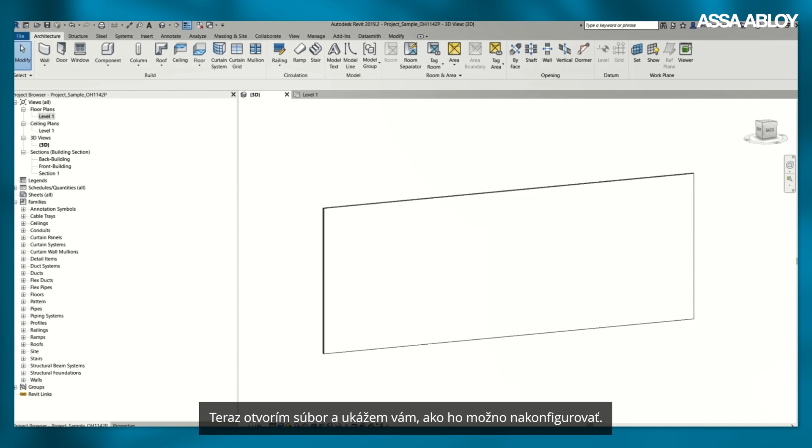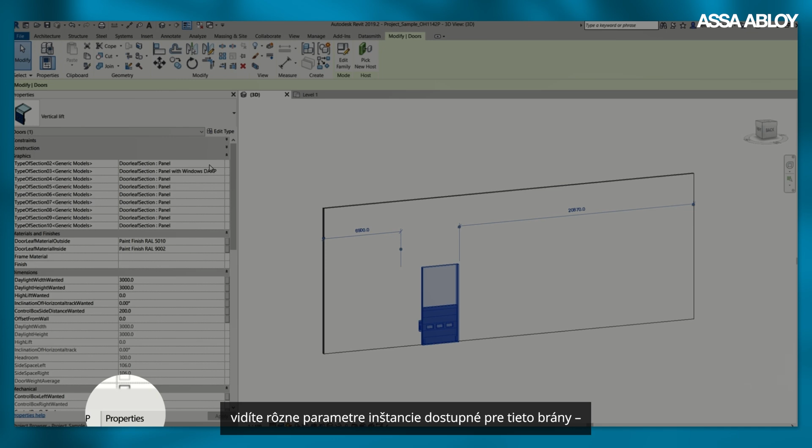I will now open the file and show you how it can be configured. I will use a sample project with just a simple wall and import the OH1142P Revit family that we just downloaded. Now that the Revit family is placed in my project, I can configure it following the product specifications. In the Properties menu on the left, you can see the different instance parameters available for this door. Everything from the dimension of the door to materials and window types.

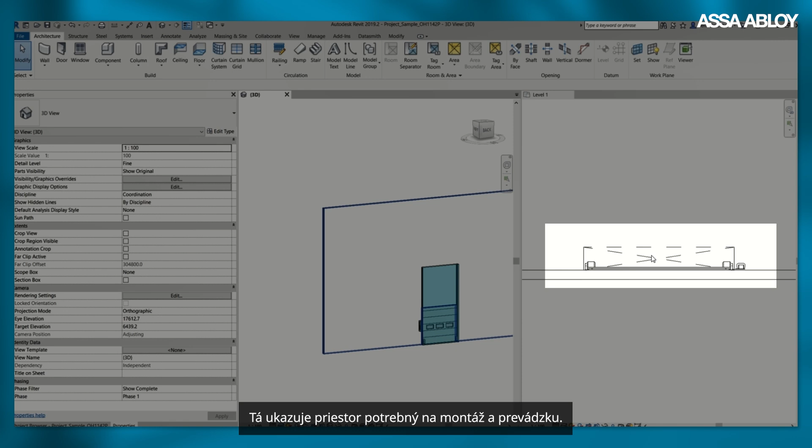When you see the door both in plan and 3D view, you'll see a clearance zone. This shows the space required for installation and operation. It will help you make sure that the door will not interfere with any other elements in your building. You can choose to hide the clearance zone by turning off the clearance zone parameter. And if you want to have it on again, you just need to turn it on again.

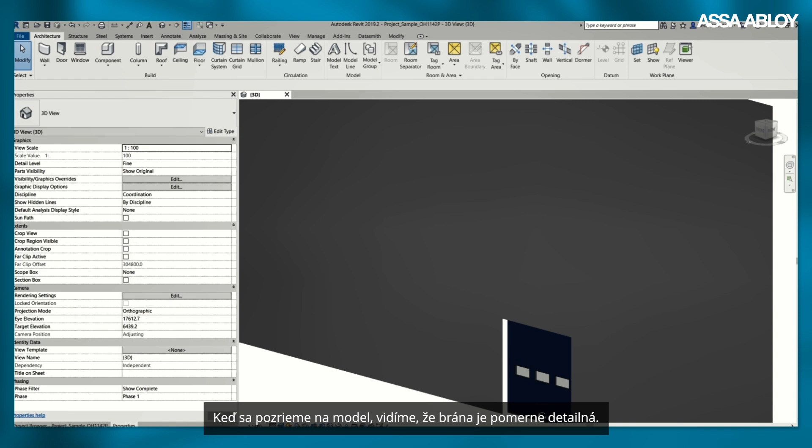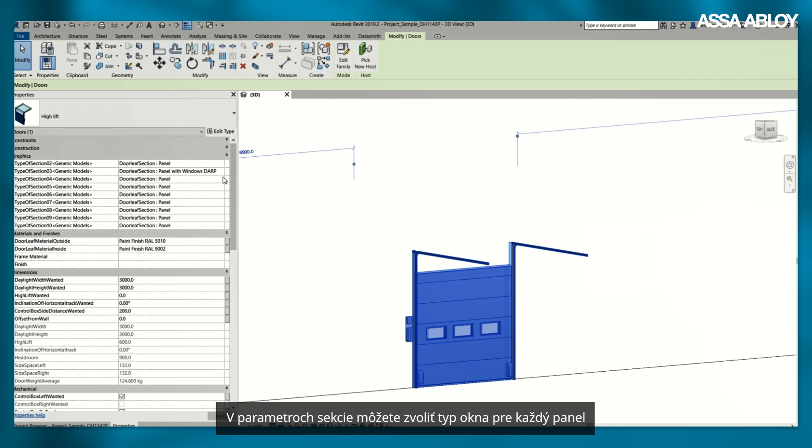If we look at the model, we can see that the door is quite detailed. We can see the material applied to the door both on the outside and inside, the number of panels, track set type, and the number of windows, for example. On the Properties menu, you can select the track set type. For this door, we have high lift and vertical lift available. In the Type of Section parameters, you can choose the window type for each panel, or simply choose a panel without windows. The number of windows is automatically calculated based on the width of the door.

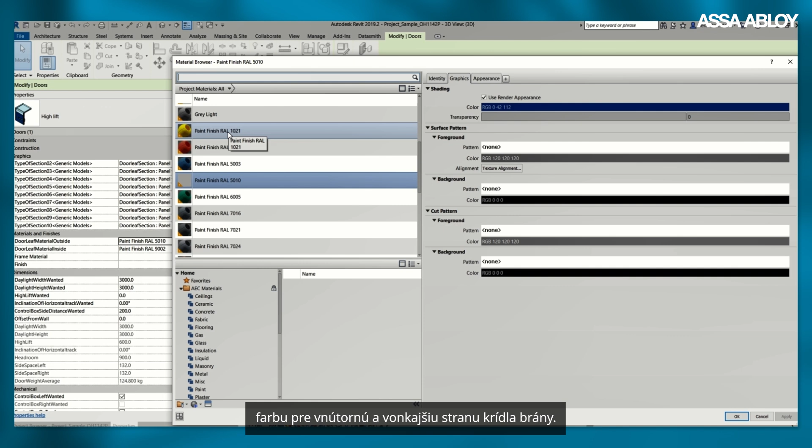Under Materials and Finishes, you'll find two parameters where you can select the color for the inside and outside door leaf. The Crawford OH1142P comes with a standard range of RAL colors. You can import the material library file that you downloaded before to guide you on this.

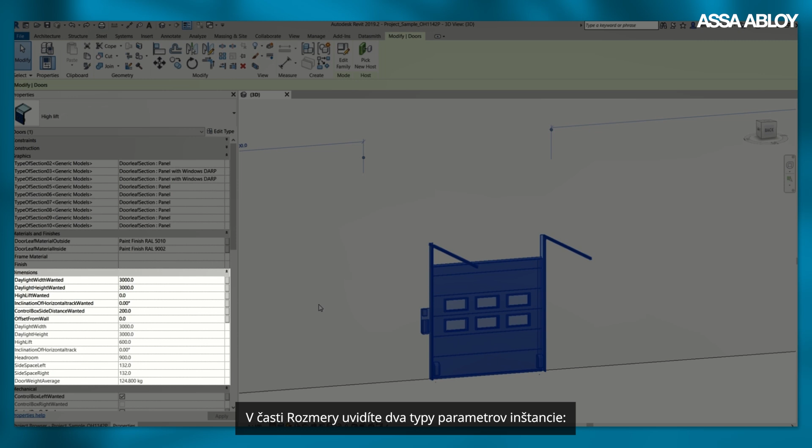Under Dimensions, you will see two types of instance parameters. The ones in black, which can be changed, and the ones grayed out, which are the corrected values. You can change the width and height of the door using the dimension parameters. There is a minimum and maximum value.

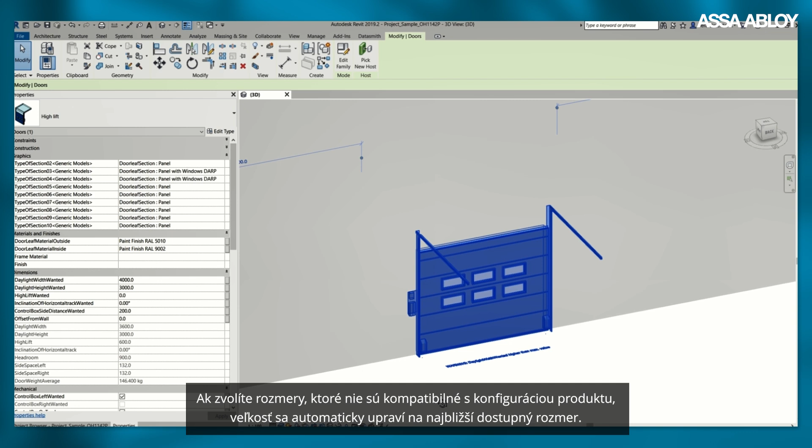If you choose dimensions that are not compatible with the product configuration, the size will be automatically corrected to the closest dimension available. In this case, the dimension applied to the model will be displayed in the instance parameters that are grayed out, and you will get an error message. The same applies to the high lift and inclination of the horizontal track.

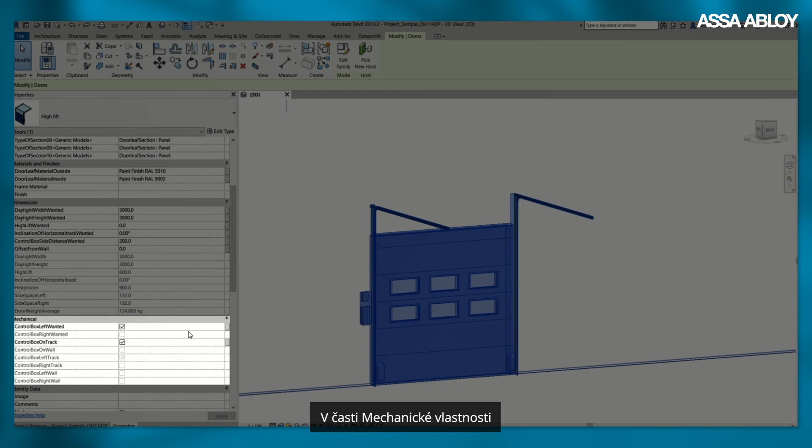Under Mechanical Properties, you can choose the position of the control box, whether it should be left or right, and its location. For the OH1142P, it can be placed on the track or on the wall.

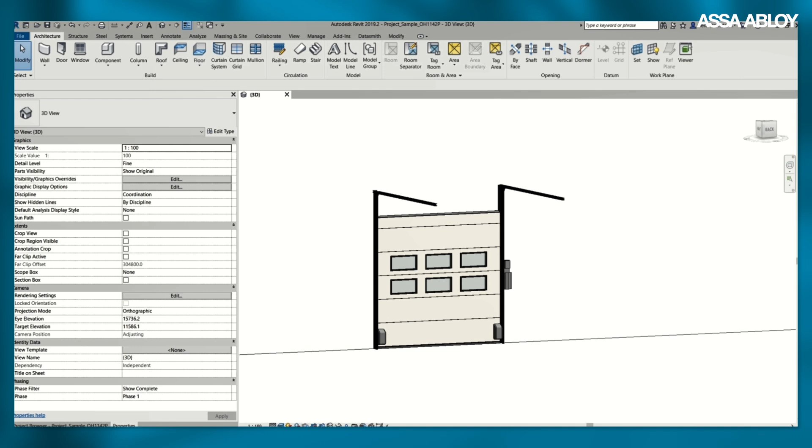This was a tutorial for the Crawford OH1142P model. As mentioned earlier, you can find BIM models for other overhead sectional doors, as well as other products, either on our website or in bimobject.com.